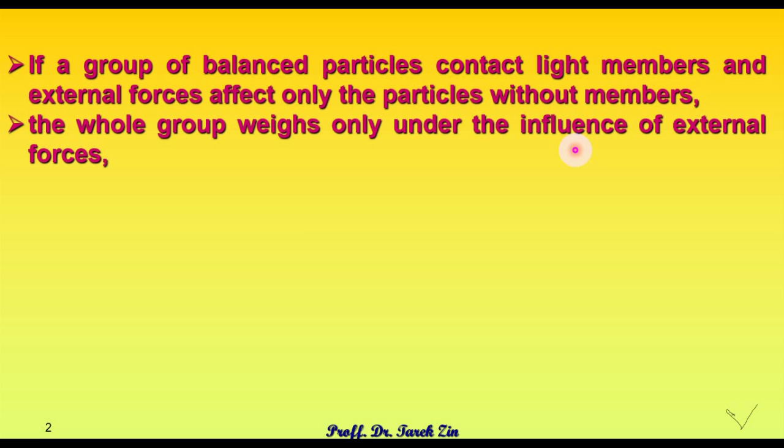Each particle has weight individually, and it receives influence from external force acting on it, as well as a reaction for the light member related to it, and they are pivotal forces in this member. ده الرياكشن بتاعي اللي بيكون reactions for external forces as axial or pivotal forces in the member.

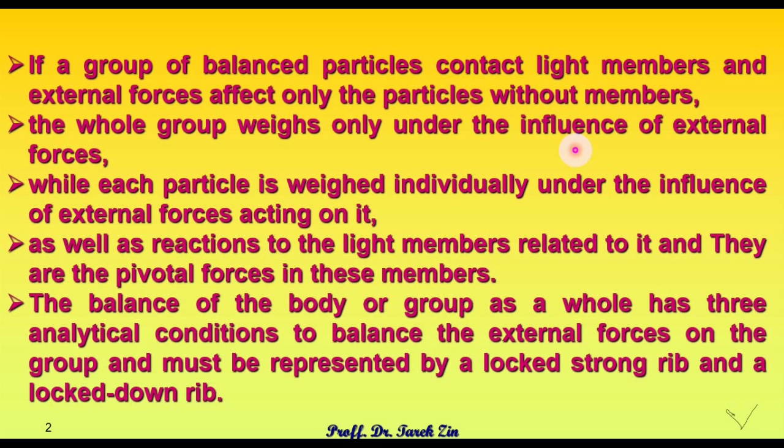وقلنا ان البالانس جروب as a whole has 3 conditions، وقلنا ان بيكون في اما مضلع قوة بيبقى مقفل، والمضلع الحبلي بيبقى مقفل، اللي هو البوليجون force is closed والبوليجون cord is closed.

To have this, we have 2 conditions only: that the polygon force is closed, and the polygon cord is closed.

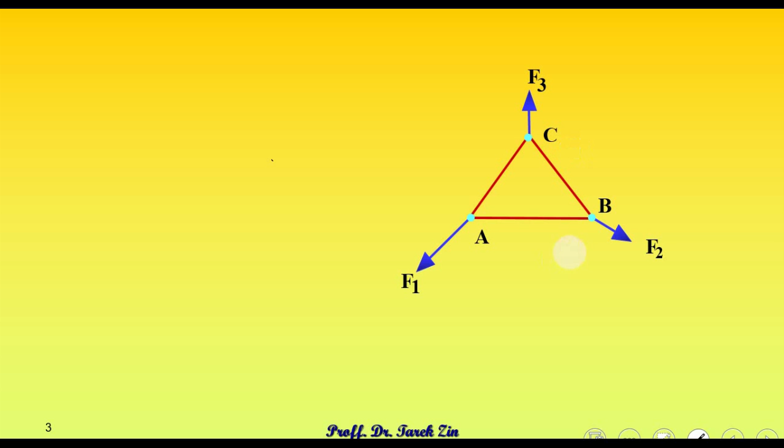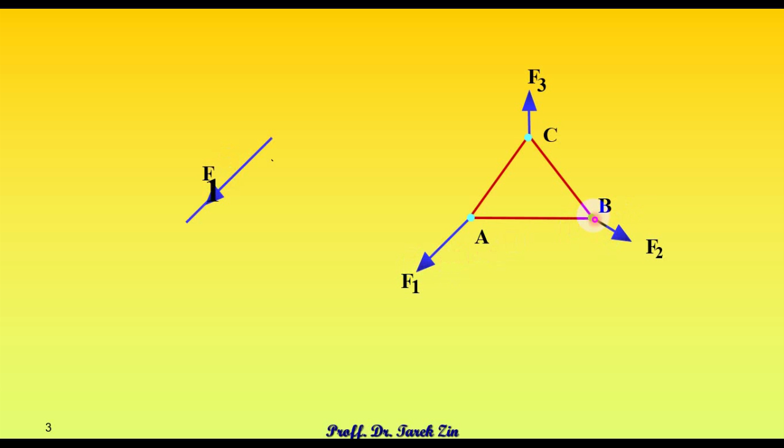علشان نوصل للحالة ديت بنعمل عملية نقل لمضلع القوة بتاعنا، بحيث ان احنا بناخد موازي برر ل F1، بحيث ان انا اشوف F1 عندي هنا هو اللي هي القوة ديت، هنقلها موازية لنفسها بالشكل ده. فبالتالي اذا كملت انا بنقل ال F2 نفس الحكاية، فبيكون بالمنظر دوت، وبعدين بنقل F3 اللي هي موجودة عندي هنا، هنقلها موازية لنفسها، وهنشوف المنظر بالشكل ده.

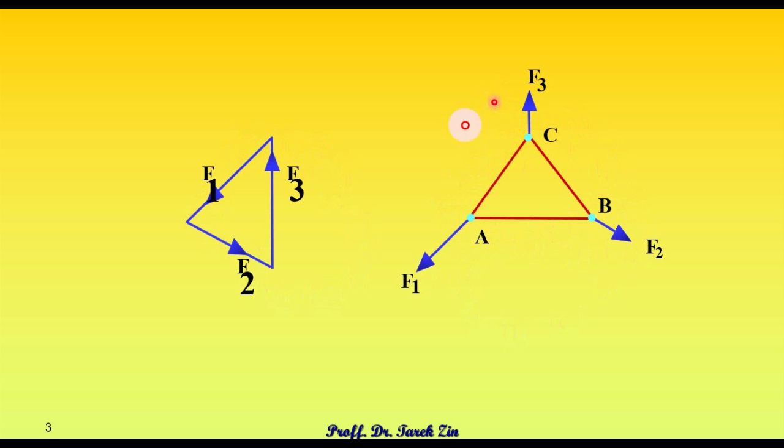We assume that we have a pole point connected to the four connection points. فانا عندي هنا دلوقتي نمبر 1 نمبر 2 دي نهاية الفورس نمبر 1، 3 نهاية الفورس نمبر 2، 4 نهاية الفورس نمبر 3.

1 and 4 are closed over each other completely.

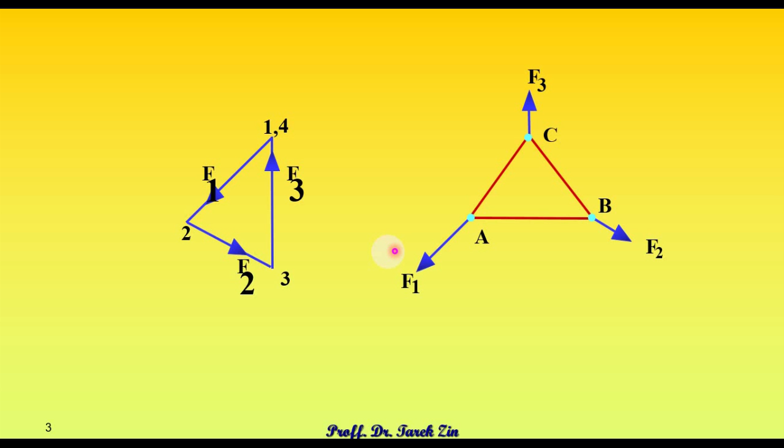If we are going to make our chord here, so we have rays coming from the pole, so we are going to select a point outside, O, and we're going to draw rays from this point to point 1, point 2, point 3, and point 4 as it is. So Roman 1 represents the first ray, Roman 2 represents the second ray, Roman 3 represents the third ray, and number 4 will be exactly over number 1.

Once we have this, and we have that the polygon is closed for our forces, we should transfer everything here to there. But before that, we have to look at that polygon.

We will find that ray number 1 and force number 1 are in the same direction, and number 2 is in the opposite direction. So this triangle of forces is in equilibrium, and these 3 lines have to intersect in one point here.

So what we have from that is just F1, so we have to transfer and transport that one, what's called I, we should bring it to here, and bring 2 to there, and both of them should intersect in one point.

We are going to transfer first one, Roman 1, like that, and we transfer this force here like that. So now we have a point intersecting here.

So we're going to look for the second triangle, which is Roman 2 in the same direction as F2, that force, and closed with ray 3. So now we should understand how to get this one.

Most important thing is that we have Roman 1 and Roman 2 here also, and these are both common factors with that triangle. So these both should transfer me from there to there, and once we only have this one.

This one is a common factor with that point. So what we should do now is intersect that one here with force number 2.

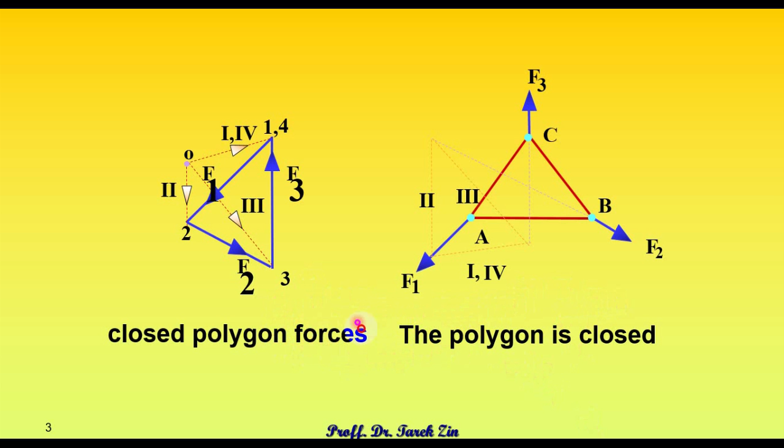and graphically with only one condition. The two analytical conditions we know are that sigma x equals 0 and sigma y equals 0, and the moment is not there because there is no moment at the particle point.

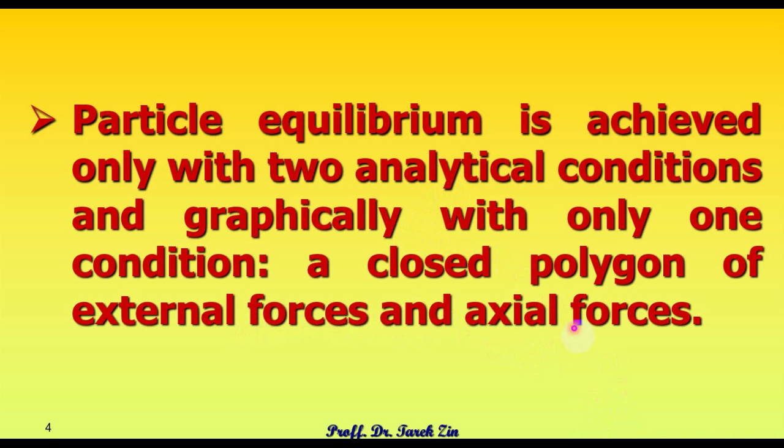However, the closed polygon for external force and axial force, these both end up closed.

Let's see, if we have 3 points like this, this first one, and we have this second one and this third one, A, B, C. These 3 points, we have it right here.

These 3 points have a member that is just only a light weighted member connecting them, and we have external force F1 affecting point A, F2 affecting B, F3 affecting C.

All 3 of them having a balance or equilibrium on that shape. That shape right now is in equilibrium.

Once we have equilibrium, each force from that one will affect these members in the axial direction, meaning it will be pivotal. Pivotal means in the axial directions, in the axial shape.

So F1 has two forces, T1 and T2, because that member we name it 1 and that one 2, and that one 3. So number 1, number 2, number 3. So this is T1 and this is T2.

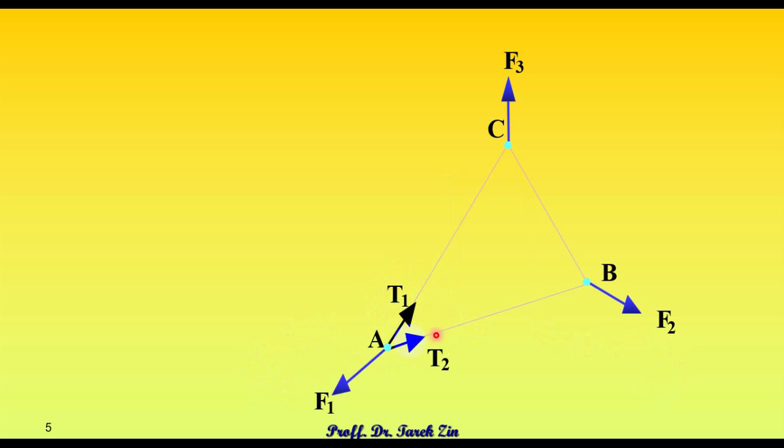T2 and T1 are axial forces. This is the axial force coming from this action, from this real force here. Similar forces will be F2 and similarly F3.

Right now each point like that one has 3 forces in an equilibrium state, so we should have closed triangles in the same direction for all the forces.

If we find that F1 transferred like that, so F2 and F3 will be transferred like this, and all of them in the same direction, so that is the equilibrium state for that particle, and exactly similar for B, and it will be equilibrium state because they're all in the same direction.

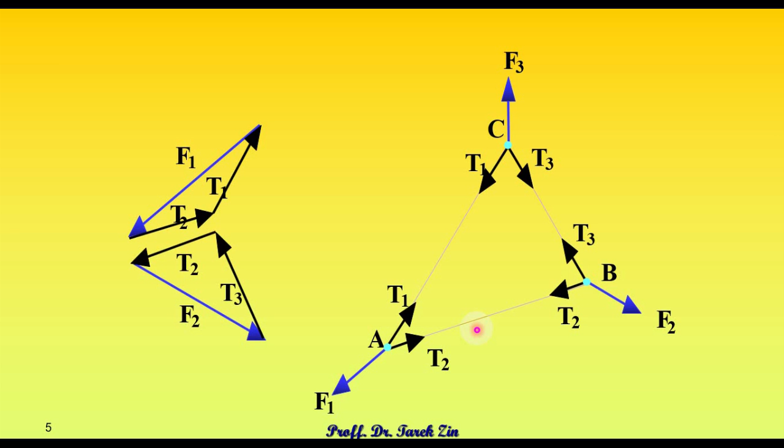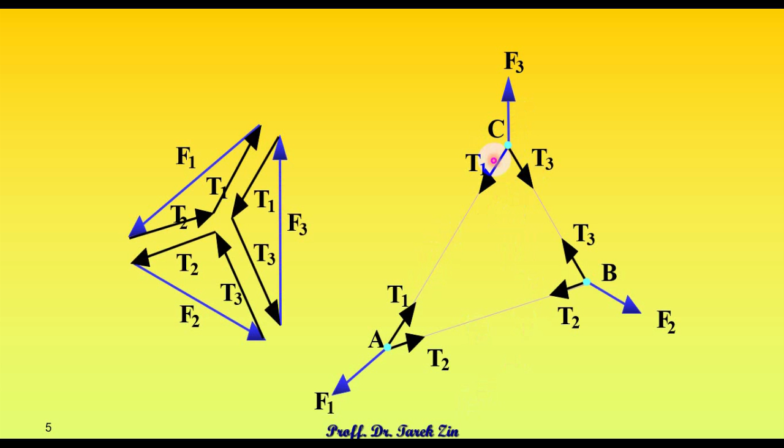And the third one, it will also be in the same directions for the three forces acting on that point. So for each particle here, that's the analytical solution of it.

Sorry, that's the graphical solution for it. So if we go further,

we understand that the structure of these light members is like steel structures of bridges or high metal towers, consisting of a group of light members, straight bars, and having a smooth joint, and we talked about that before in the lecture.

And these bars or members, we call them members of the structure.

Also, if we go further, the members are considered with either armrests or fasteners, and they act as compressed organs or tight members, meaning that they act as a joint.

So what we have from here as an abstract is that we are not going to load the member itself, but we're going to load the joints, just only the joints, not the member.

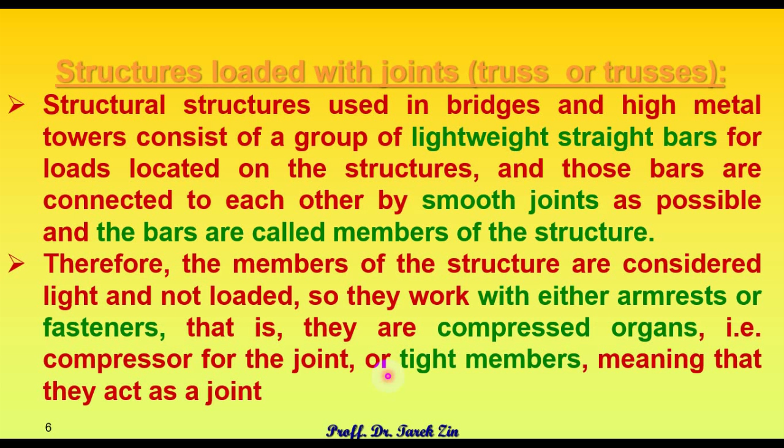So what we studied today, our lecture today, was concentrated on the particle. So once you talk about the particle, you're talking about the trusses, you're talking about the joints, you're talking about the particle itself.

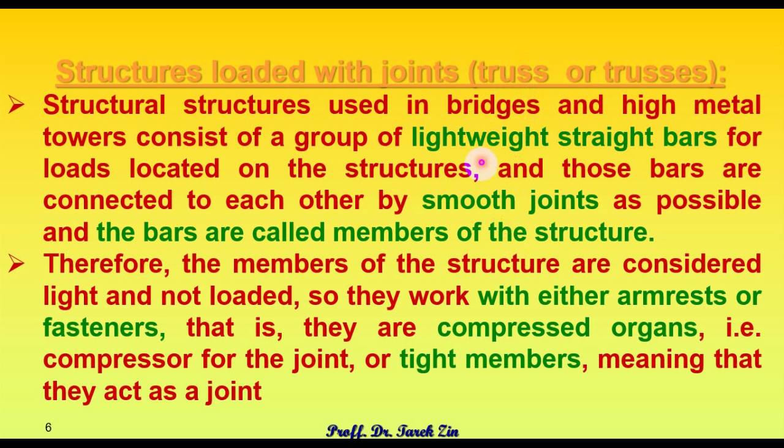Let's go further and take an example. This started in the lectures before, and we have joints here A, B, C, D, E, F, and external forces, all in the Y direction, so our reaction will be in Y direction.

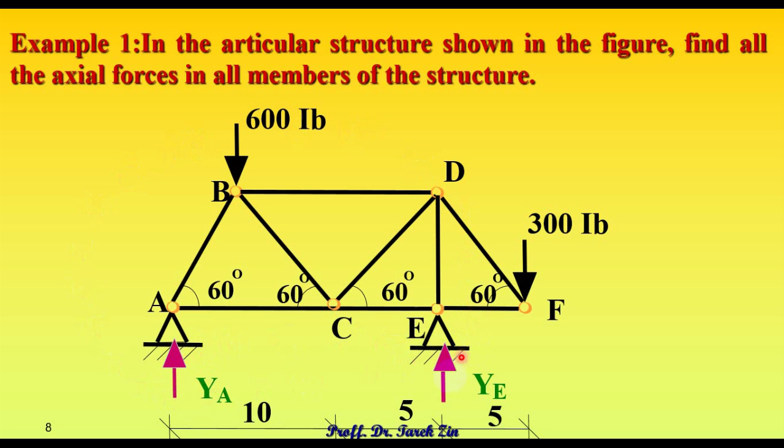Then you have to take sigma moment either around E or around A, ignoring sigma y, and take one point as fixed, summing all moments around it. Then change to the other point and take another sigma moment there. So we study the equilibrium of the group as a whole and get YA and YE as follows.

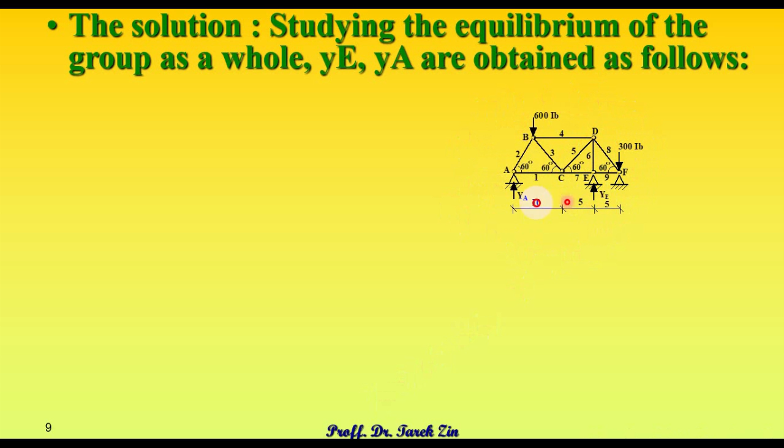This is our body with the forces and reactions, and we take the moment around each point, so this won't be stable until you get the moment balanced like that.

Here we assume that going counterclockwise is positive, so we have to fix that convention for all solutions in all steps.

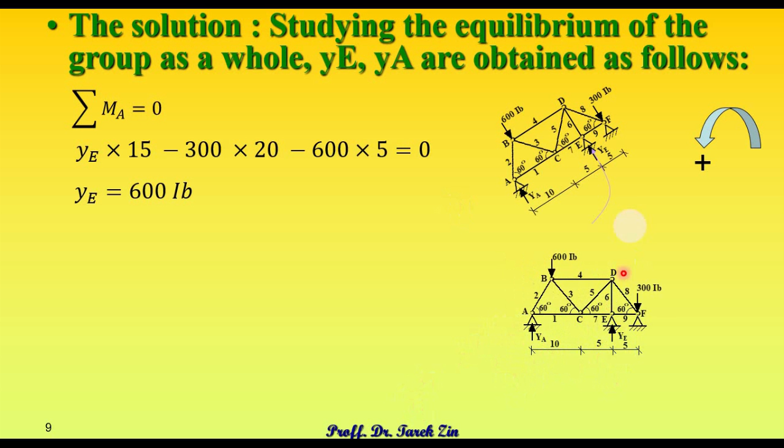The second reaction comes from taking the same body but fixing E, starting with all forces around this point under the same condition. So sigma around E will be similar, this y multiplied by 15, but this time clockwise, and the others clockwise, and only this one counterclockwise. So this will be positive, and these negative, negative, and this positive.

So we see that one reaction will be 300, and the other one 600.

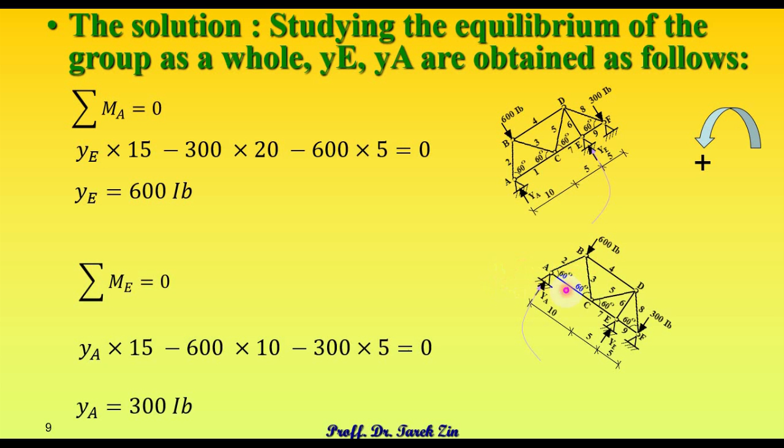Now we have this body solved with these values, so we are ready to solve for the member forces which act due to these reactions and forces.

Now we want to get the equilibrium of all these members, but maybe we don't want all of them. Maybe we only want member CD.

So you have to solve up to this point and stop, don't get the others. Starting from here, you get that member and this member and that member, so the other 3 or 4 members we don't need.

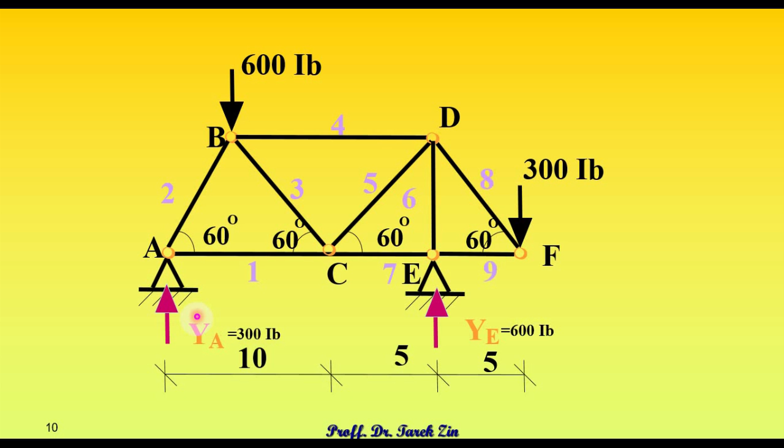Let's see what we are going to do. First we will name each member with a number. So assume this one is member 1, the second one 2, 3, 4, 5, 6, 7, 8, 9 members. So we have 9 members, 9 forces, and we should find these axial forces in each member.

Right now we have to study each joint separately, substituting just the action lines instead of the member itself, and put the external forces like we have done here.

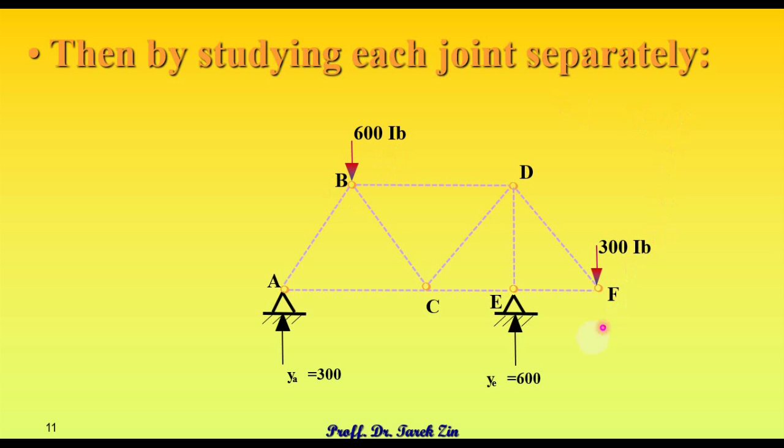We put external forces here, reaction forces there, now we want to put the member axial forces. Let us use the numbers we named for the members before, starting with this T2 because that member is 2, and this is 1.

Of course we have to have some directions for this one.

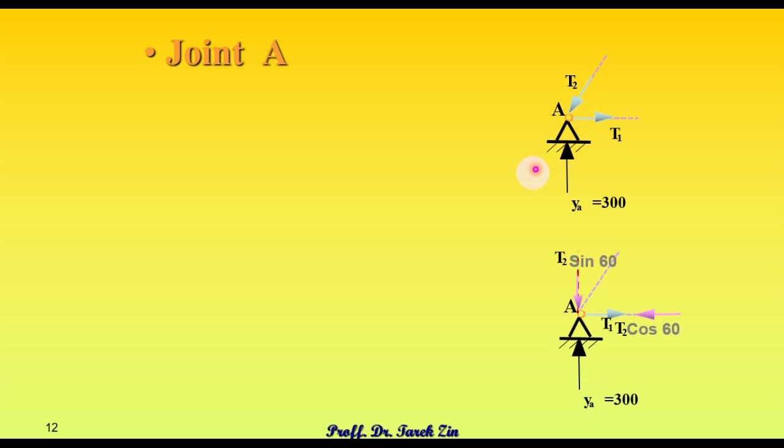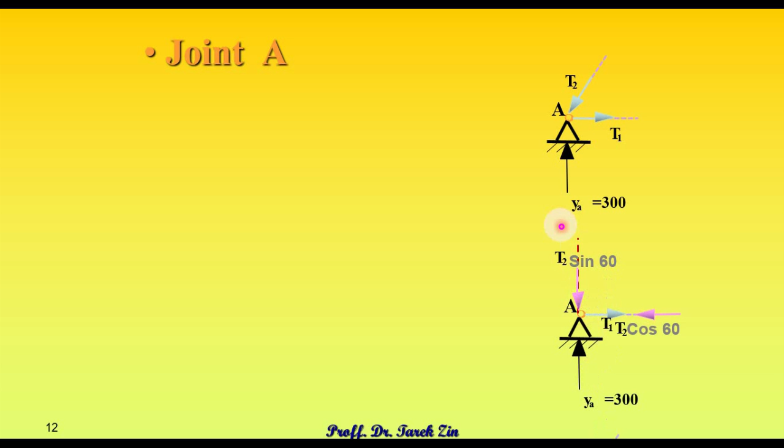And now let's start talking about the analytical solution. First equation will be sigma y equals 0. So sigma y equals 0, meaning I only have 300 in positive and this one in negative.

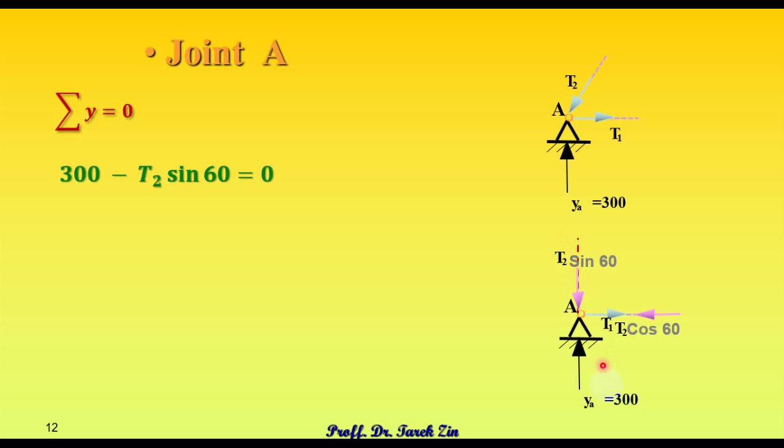والايكويشن دي ممكن تطلع لي T2 equal this amount. And once this compression like that هنقول ان T2 ديت compression force. يبقى احنا كده بوزيتيف يبقى الفرض اللي احنا فرضناه صح compression.

وزي ما انتم شايفين ان اهوت تي 1 بنسميها tension forces. So we have compression forces and tension forces, and both of them are what? Are positive. So our assumption is correct.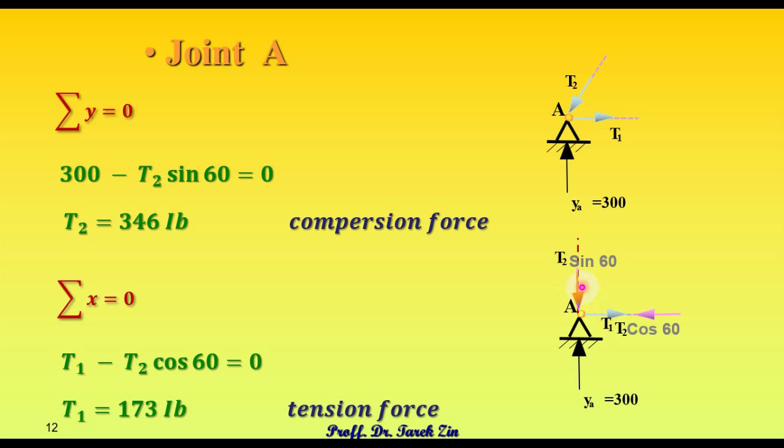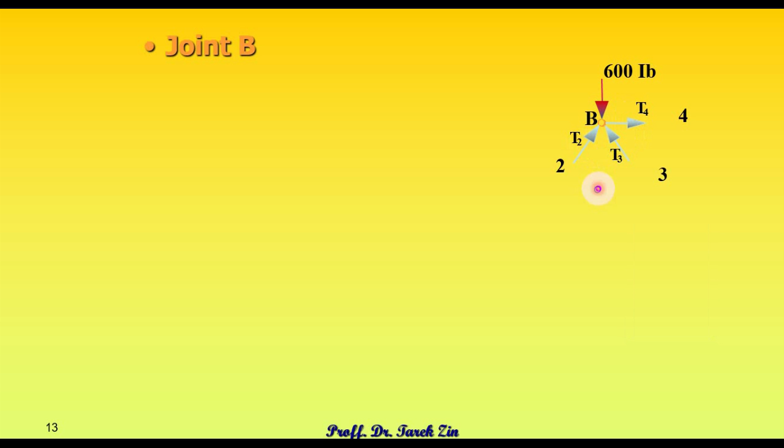نبتدي نتنقل للخطوة اللي بعد كده. We're going to get joint B. Joint B احنا جبنا joint B لوحدها خالص، فيها 1 known وعندي 3 unknown, but now ديت بقت already known خلاص. يبقى احنا عندنا الاثنين unknown اللي هي T4 و T3.

If we look at that one right now, we have this joint B. Joint B here is of course to get it we have that known and this known and that one unknown and that one unknown. يبقى عندنا this known و this known ودي unknown ودي unknown. طيب right now

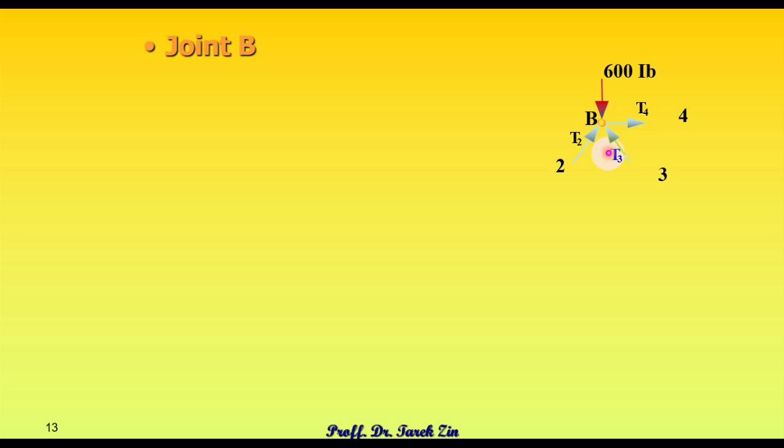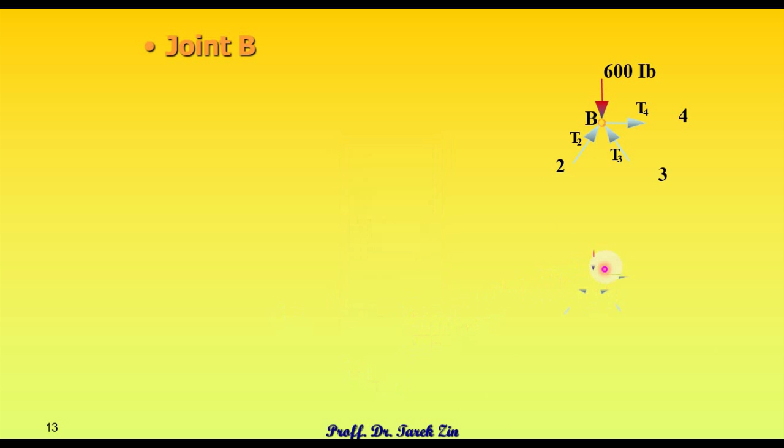نحاول نكمله بحيث ان احنا نشوف الفورسز اللي موجودة عندنا. فهنلاقي ان احنا عندنا زي ما احنا قلنا قبل كده اهوت ان احنا عندنا الجوينت ديت هي المجهولة وده مجهول، فاحنا بنحاول نحلله. فاخدنا اول واحد اللي هو T2 على كوزين على الواي، فالواي بناخد ساين والاكس بناخد كوزين، فايا كانت T3 اهي ساين 60 و T2 ساين 60 هيبقى اتبقى لنا ان احنا نكمل الكوزين. هنلاقي ان احنا هنلاقي عندنا two forces axial T3 و T2.

يبقى الخلاصة بتاعت الكلام we are analyze the forces we have here. 2 we get it as 2 sine 60 and 2 cosine 60. Number 3 the same thing, cosine and sine, and this will be so everything is now x and y.

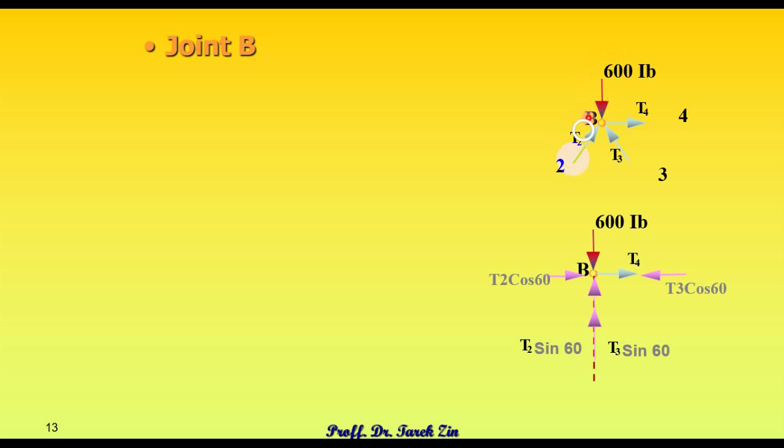Once we have x and y, so we have two conditions and we apply these two conditions, and it doesn't matter the number of unknown variables, but we have only two unknown variables, the T4 and T3, and we have a variable T2 and 600 are known variables, so we have only two equations and we can get it easily.

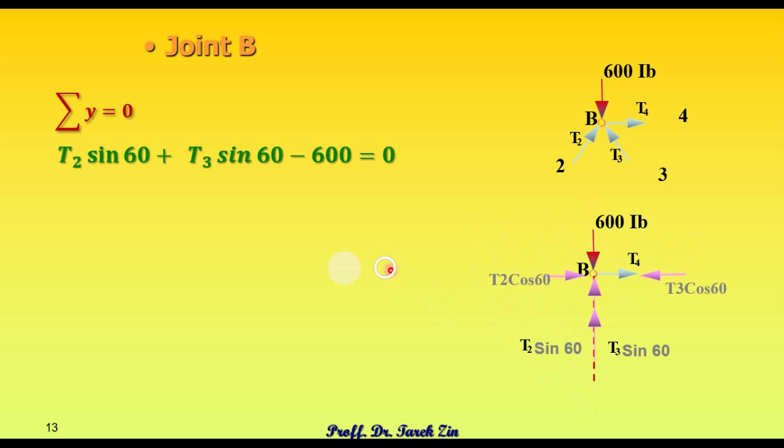Right now at sigma y it will be as what you see here, this force sine, each sine, and T4 it will be already have it in that one here. This all this y so in this one of دي في y, so we'll take it like that. So T2 sine and 600.

وانكنون مين؟ الunknown عندي اللي هو that one is unknown variable, so we will have it here right now. That one it will be this and the condition. Let's see. احنا بنتكلم على T3 اهي compression اوكي positive، يبقى الاسامبشن صح.

نكمل. هنلاقي الاكس وعندنا التي 4 والتي 1. دي طبعا تي 4 مش تي 1، احنا دي خلاص خطأ موجود عندنا، بس دي المفروض دي تي 4 تطلع بزيرو، يعني لا كومبريشن ولا تنشن، وده ممكن يبقى العضو غير محمل تماما بأي قوة.

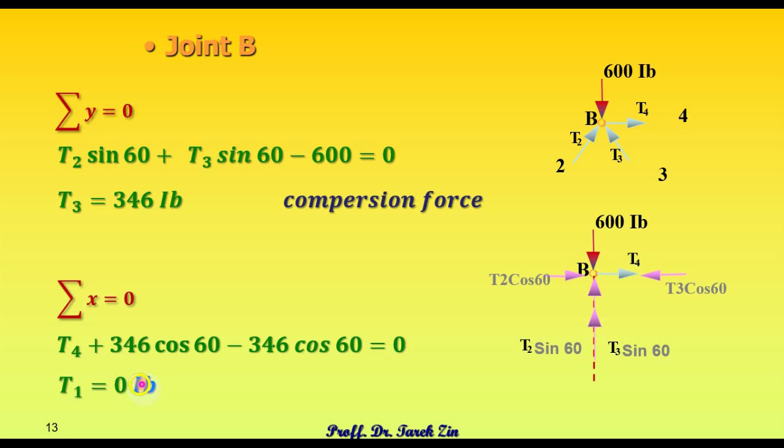نكمل. هنخش على جوينت سي نجيبه زي ما هو كامل، ولما نجيبه كامل هنلاقي عندنا احنا عندنا اساسا المعلوم 1 وعندنا نمبر 3، فيبقى عندنا 5 و 7 هما الانون بتوعنا اهم، دول الانون فاربلز بتوعنا، ودول الفاربلز اللي احنا عارفينهم واللي جبناهم من الجوينت بي.

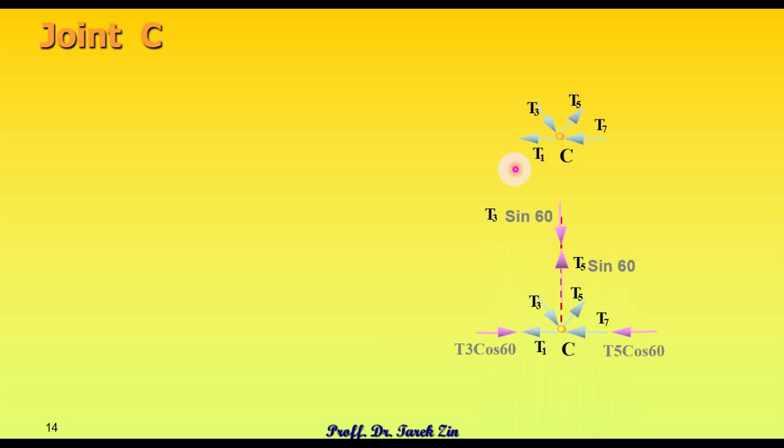لما نكمل هنلاقي نفسنا هنعمل عملية اكس and واي برضو زي ما انت شايف كده اهوت. هنقول والله both forces اللي هو 3 ساين وال5 ساين، والاكس هتبقى كوزاين وكوزاين، ودول يبقى راحوا اختفوا من عندنا.

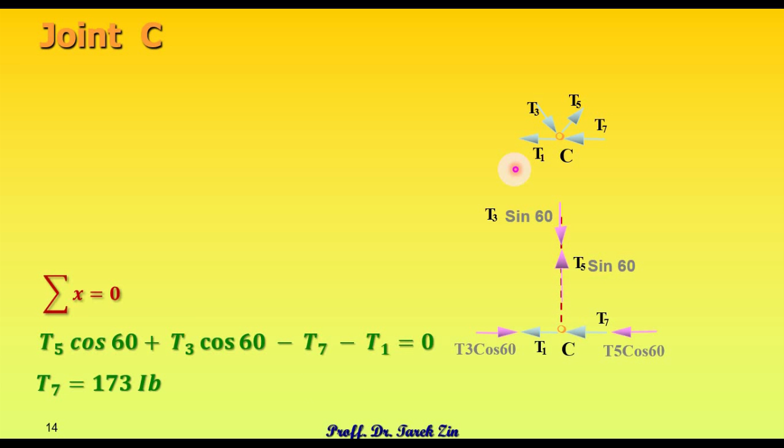وبالتالي السيجما اكس هناخدها اهي كلها قوة ماشية مع بعضها، وبالتالي 7 هتطلع كومبريشن. في نفس الوقت الواي قوتين وقيمتهم تنشن، وزي ما فرضناهم طلعوا مظبوطين، عشان كده الإشارة موجبة.

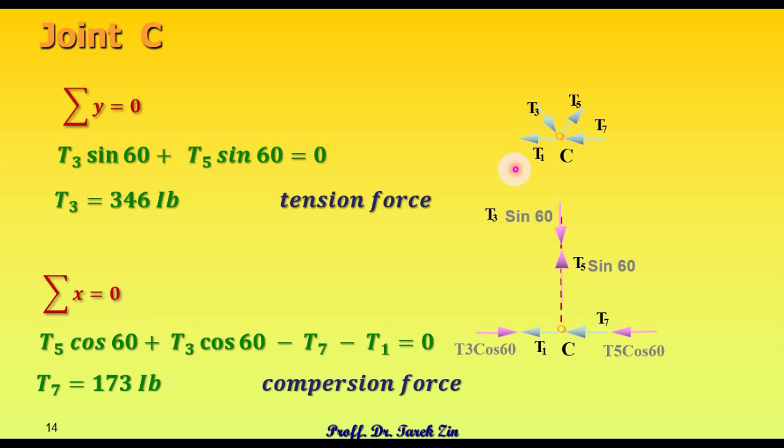لو كملنا الدي فيها 4 قوى، نفس الكلام اللي احنا اتكلمنا عليه قبل كده هنقوله. احنا عندنا القوة هنا هو في نمبر 5 ونمبر 4 انا عارفهم، 6 و 8 هما الانون مش عارفهم، مجهولين بالنسبة لي. لو كملت وحليت هلاقي نفسي وصلت لهذا الكلام.

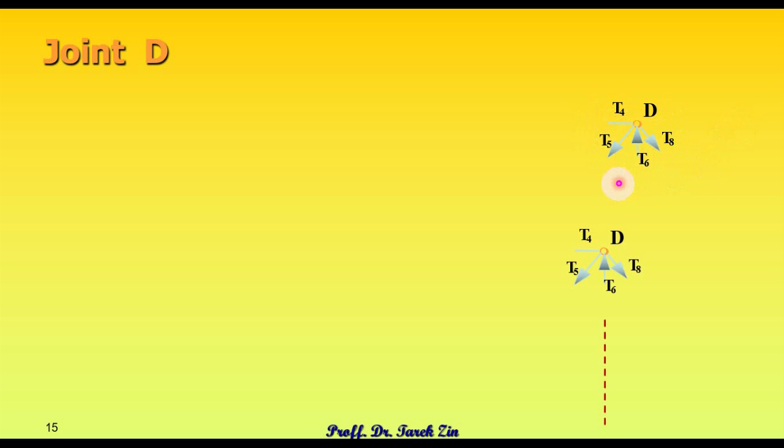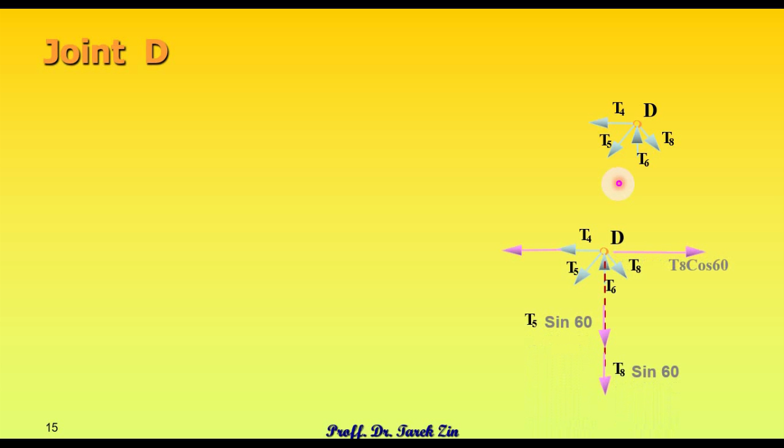في قوتين لازم يتحللوا، 5 و8 هحللهم في اتجاه واي ويطلع لي بالساين، وحللهم في اتجاه اكس وهيطلع لي بالكوزاين، والاصل بتاع القوة دي كأنها مش موجودة عندي.

طيب لما اكمل الاقي المعادلة بتاعتي، ادي اول معادلة اهي اللي هي ديت فيها حاجات واي ساين وساين اهي، يبقى انا كده هو دول ساين ودي ساين اهم جايين هنا. وقيمة القوة

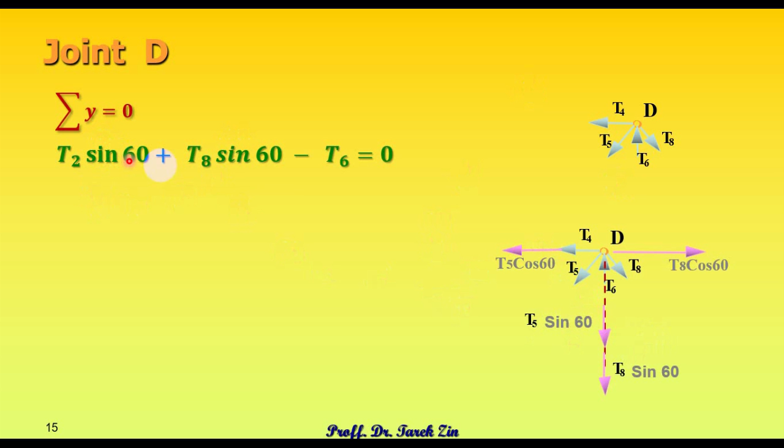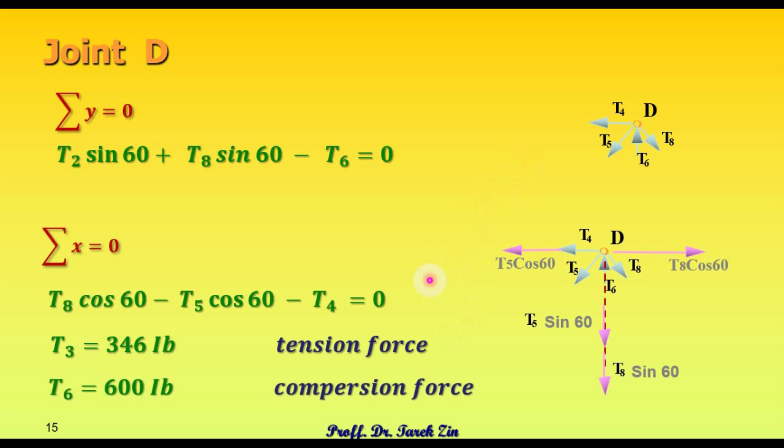اهي طلعت القوة بتاعتنا 300 شوية، لا دي مش من هنا، دي الاكس بقى اهو 8، فعندنا القوة 8 هتطلع والقوة 6 هتطلع، جبناهم من المعادلة التانية.

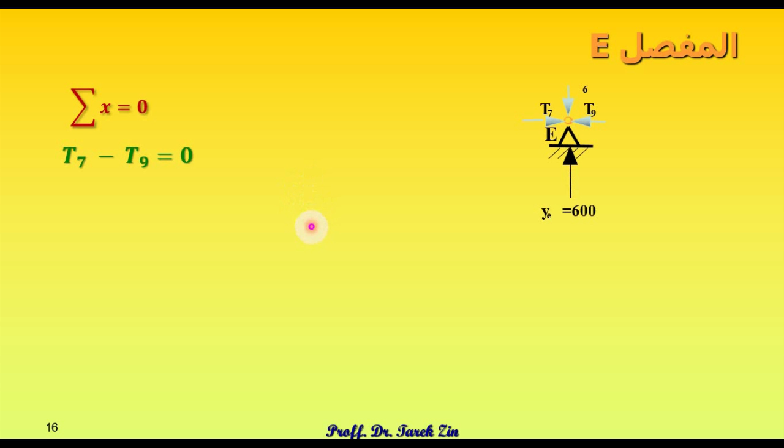طيب هنا اهو بنوصل E اهو اي نفس الحكاية، ده مفيهوش اي حاجة عايز تتحلل. سيجما اكس 7 و9، 9 هتطلع بكذا كومبريشن، وكده يبقى احنا خلصنا المسألة اللي موجودة عندنا.